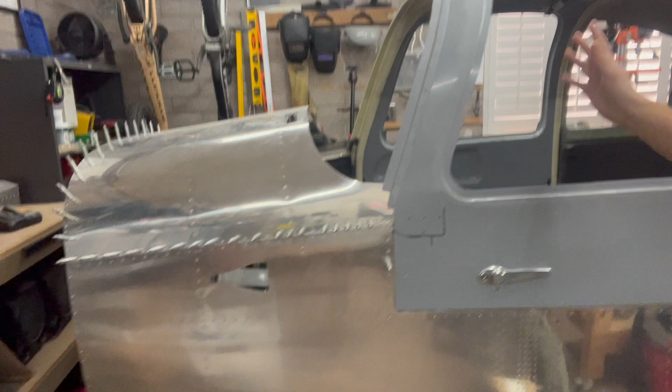By the end of the video you'll see the doors being done, and I use that term loosely. They're mostly fitted to the side here. I may have some work to do on the gap still. I don't have windows, and don't have seals just yet. This stuff is temporarily in place, but the doors are good. That's that door there, and I'll show you the other door real quick before we jump into the video.

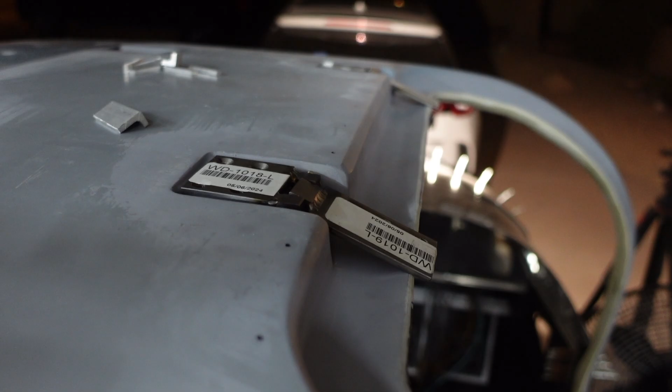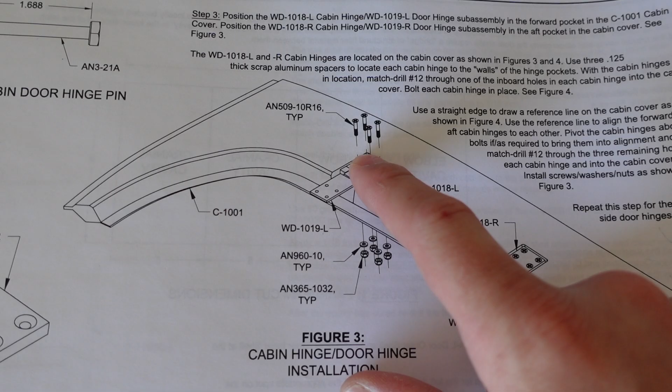Alright, I went ahead and last night ordered new hardware, but the hardware called out is 16 length screws, which is very, very long. I'll show you real quick, but I ended up ordering 14 length, which I think will be a whole lot better, or else I'll end up with an ugly stack of washers underneath here.

Going back up here where I haven't yet drilled all the holes, just the initial inner hole, that's a 16 length screw and you'll see it's way too long. I have that hole drilled, the inner hole drilled, so I'll continue with the plan of drawing a reference line, keeping them square, and continue getting them match drilled together.

I don't have enough of those 14 length screws to do this, so I'll just end up with a stack of ugly washers underneath for now, temporarily. So let's get to it.

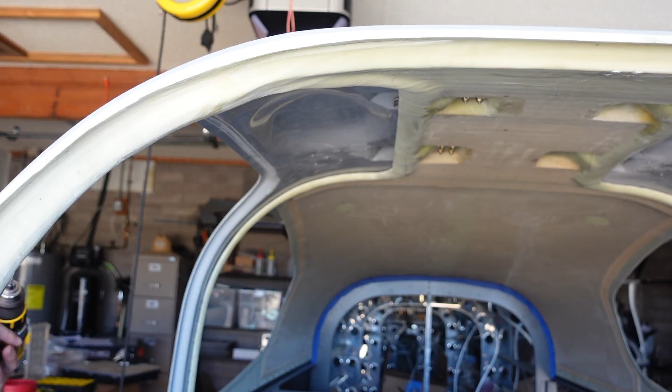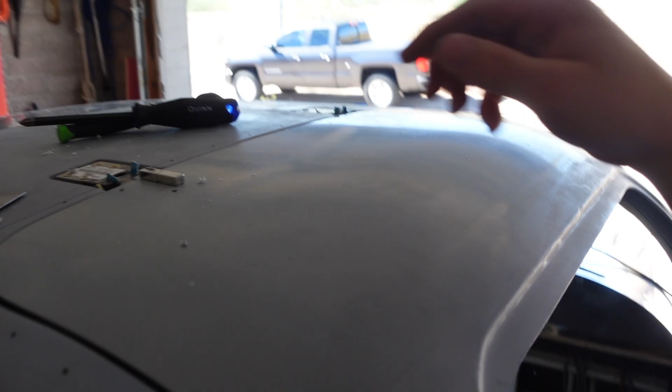Don't do what I did. I did not hold the top down while doing that, so the drill bit was pushing the cabin top upward and away. Now that hole doesn't line up right with the hinge underneath. I'll have to take this off, fill it, and redo it again.

If you're doing this, yes, the magnet works. Little spacers here keep the hinge centered - I saw a post recently of someone asking how to keep that centered, and I chose to use a couple pieces of aluminum. So next time I do this I need to keep positive pressure downward while drilling from the bottom.

The other thing you'll see is I have the screw backwards here. The reason is there's a little lip on the inside that was keeping the hinge from sitting perfectly square, which is no worries - I just flipped the bolt to the other side, knowing that during final assembly I'll probably carve out a little room for the bolt head to have it in the proper orientation, because if you look down the side, it's sitting slightly proud on top there.

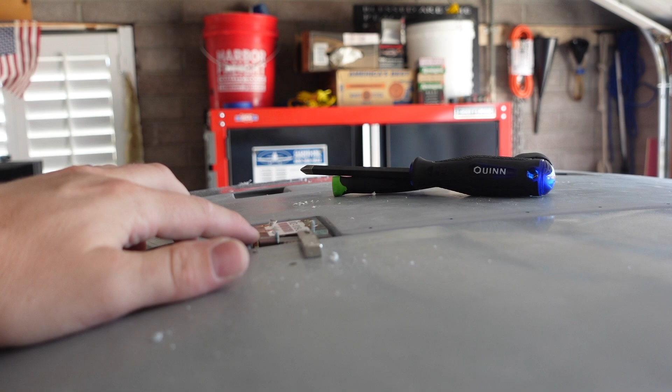Anywho, quite a few lessons learned here. The magnets, yes they work. Shims to keep it centered, yes, but keep downward pressure while drilling from the inside, or else you end up with a crooked hole like me.

Might as well give this a shot. I was going to take this off right now, fill it, and let it cure, but since I'm already going to be messing with it, I might as well try this first. If it doesn't work, I'll know for next time - that way I'm not letting this cure, trying it, and having the same thing happen again.

Sorry, Amanda. Hopefully she never sees that. Now you can get a better idea of what happened here.

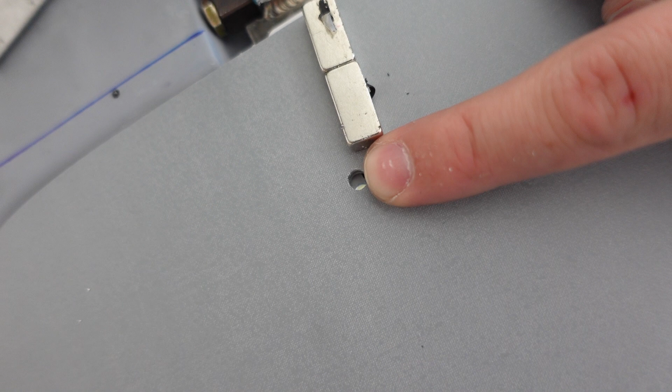So the first one there, the whole thing shifted. It kind of lifted up as I was drilling. The second one with the weight on it, which now no longer weighs 25 pounds - now it's 25 pounds minus that much. But anyways, the new hole is there, so you'll see the definite offset there. So you definitely want to weigh it down or hold it down by hand when drilling this. Again, I'll just end up filling that, letting it cure, and then re-drilling this hole here.

So I'm gonna go ahead and knock out the rest of these and check back in with you in the future.

Late night session for Bob the Builder.

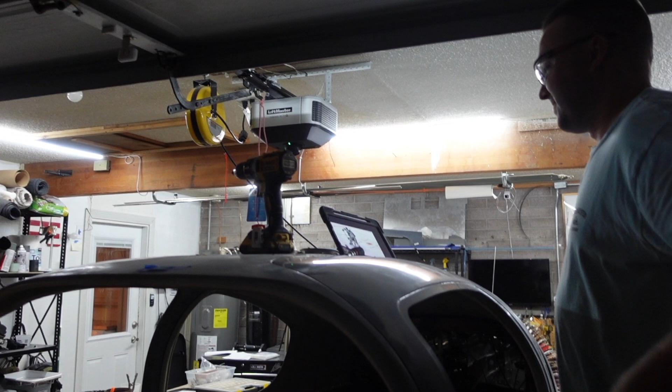Doors are going on, or at least temporarily going on. There's some multitasking happening over here. Let's see if I can zoom in. I'm being a horrible YouTube content creator.

Yeah, I'm not recording this, but Permagrit countersink heads are awesome. I bought the full set that comes with every size of screw. It's a really, really nice countersinker that works perfectly with each size screw. What's it called? Permagrit. Permagrits. I think they're somewhere across the pond.

So next step, safety latch. I am not going to be doing section 45A, which is for that cabin door safety latch that the plans call for, and that's included with the kit.

So I bought the 180-degree third latch deal, and then the next day I had second thoughts. I was like, you know what, I'll buy the angled door pins too, which I'll get to later. But it should look really, really nice.

But shout out to PlaneAround, they have fantastic customer service. I placed those orders one day apart, and it was one of those things where you place the order and the next day you're like, dang it, I could have bought that one other thing and saved $10-15 in shipping. But they actually caught that, and they sent me a message saying, hey, we saw you place another order, we're gonna refund you that shipping amount and ship it out in one box.

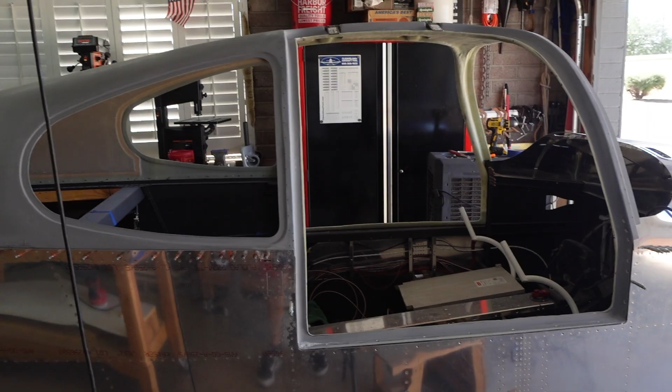So another thing we will most likely be doing is keeping the door seals stock, which is very contrary to what other builders are doing. Most people are ignoring the factory seals from Vans. The factory seals sit on the inside. I'll include a picture here.

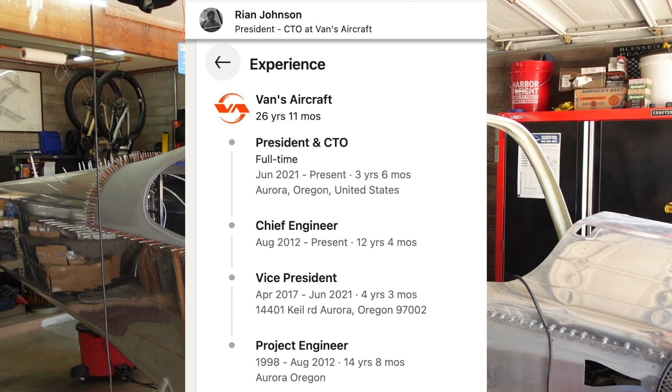When I was at the booth at Oshkosh and talking with Rian Johnson, I asked him for his opinion - hey, what's going on with the door seals? Were they really that bad that nobody puts them on? He mentioned it was one of those things that caught on and just took off, and it became kind of the standard for a lot of builders, but he said there's no issues with the factory demonstrator plane using their seal.

Another thing he mentioned, the reason why he doesn't like it, or why they don't endorse the McMaster seal, is that this gutter system is a piece of the overall structure of the top canopy. My own uneducated builder perspective, and likely a lot of other people's, is if most people are installing the McMaster seal and they're fine, and we don't have canopies collapsing on people, it's probably fine to do. Again, I don't know what I'm talking about, but I think that's the general consensus - that it's fine to modify this.

But given all this, and looking at the picture of the one at Vans, I didn't think it looked bad. I know a lot of people mention in their videos or builder logs that the one from Vans is ugly - I don't think it looks bad. No one else out there is doing the stock seal. If it's good enough for the factory demonstrator plane, which gets opened and closed all the time and gets lots of use, it's probably good enough for our plane to keep it stock.

So we'll be one of the only ones out there using it. So yeah, it should be fun.

So I'm gonna go ahead and jump into doing the door latch install. I'm not honestly going to get a lot of close-up stuff in the very beginning here, or else I'll just be burning footage, because I'll be staring at instructions and little pins and whatnot. But I will do recaps with little lessons learned along the way, or at the very end I'll provide you a recap of what I found and what I did.

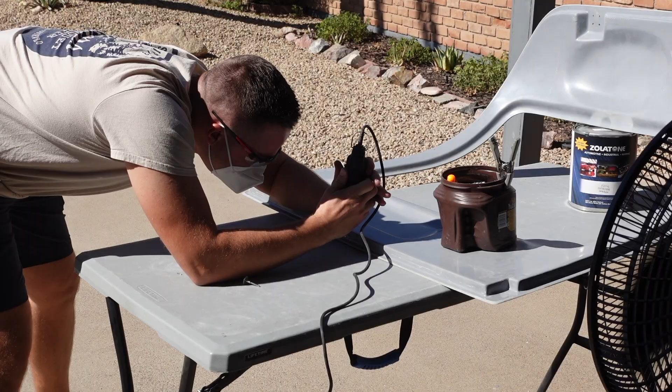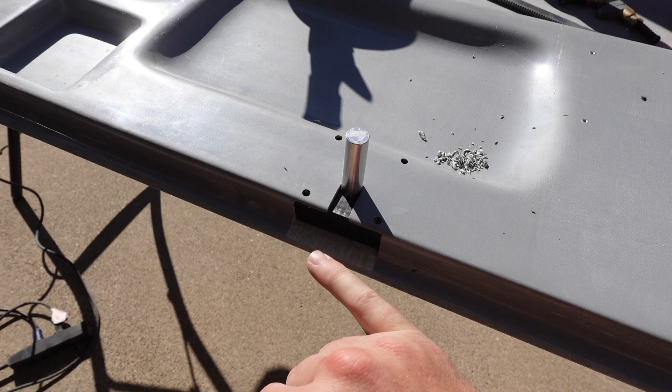So I've got this cut out, match drilled in there. One thing to keep in mind - I don't know if the plans are made so you're able to glass this in after the fact or not, but if you follow their plans and drill your hole that you enlarge to a half inch where they have you do that, it ends up being pretty deep in there. I think that's gonna be fine. I may end up actually glassing in the bottom. I'm not sure yet. I saw in his instructions he mentions that his is going on 11 years and still doing fine without needing replacing.

So I may end up just glassing it in, but I've seen in other build logs or videos where people have it nice and flush there. If I was to do that, I had already actually drilled this hole where it called out, so I'd end up with that gap. Instead, I just left it - I match drilled it where I had already enlarged that to a half inch up top there. So I'm gonna end up with a little bit of a gap there. I may end up glassing this in, or maybe just shim it with a piece of aluminum that matches, and then do my seal on top of that.

You'll never see it. Anywho, so I'm gonna go ahead and move on, start the next one, and then probably get the little support brackets epoxied in there.

The blocks - whatever we call them, the reinforcing blocks that they have you epoxy in there - are in and cured. So now I'll have to go back through. I'll have to do a little more sanding just to get any clumps, since there's really no way to work super cleanly inside of here.

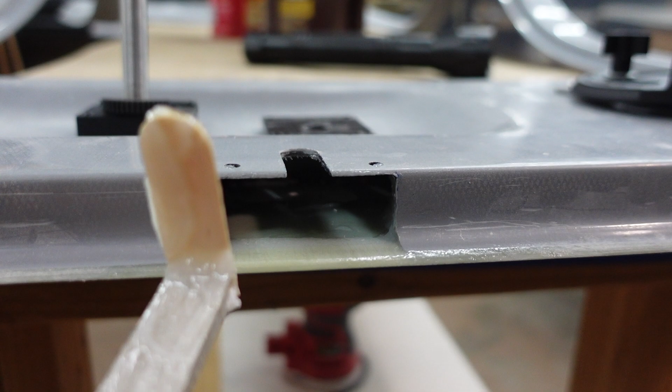But one thing I wanted to mention that helped me work cleanly - I took a tongue depressor and super glued it to the end of a piece of a stick. What that did is allowed me, when I had this epoxy in there, to be pretty dang messy, making sure I had a good fillet on the top and bottom, but also ended up with quite a bit of epoxy on the back side.

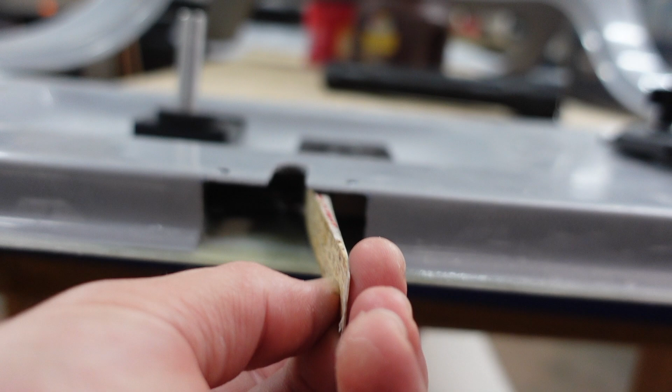So I took this tool here, scooped it through, and I was able to really kind of smear it around. I can't see in there, but I'm assuming I ended up getting a nice amount pressed up against the back side of each of those blocks. I think it also kept this area clear of epoxy where we're gonna have that gear.

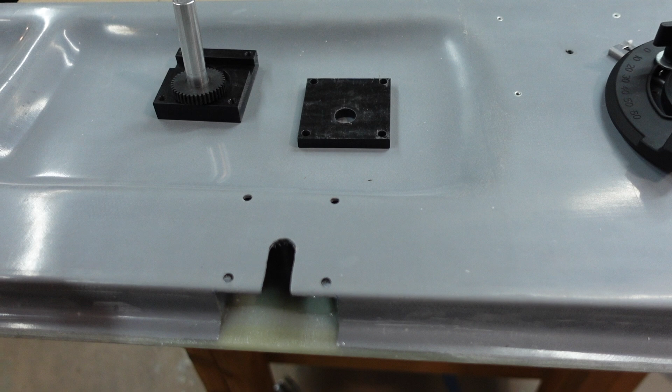I don't have it in front of me, but there is gonna be a gear inside of here, so it kept that area clear. If I did not use this, my messy job that I was doing, if it cured, would have probably left a pretty chunky layer back there behind these blocks. So that worked well.

Alrighty, YouTube. I am working on the handles, and I'm having the same struggle that every other builder out there seems to have, because most people are doing the flush door handles with the Aerosport third latch and the stock setup for the rest of the mechanism. So you're trying to incorporate 3 different sets of plans. There's no real easy way to do this, especially filming.

Filming, I've found I've already burned through quite a bit of footage already, where I think I'm about to start doing something and then the camera's recording and I'm just staring at a part. So I'm going to do my best to provide all the little gotchas that I can, but I apologize ahead of time - it's not going to be the most seamless thing in the world.

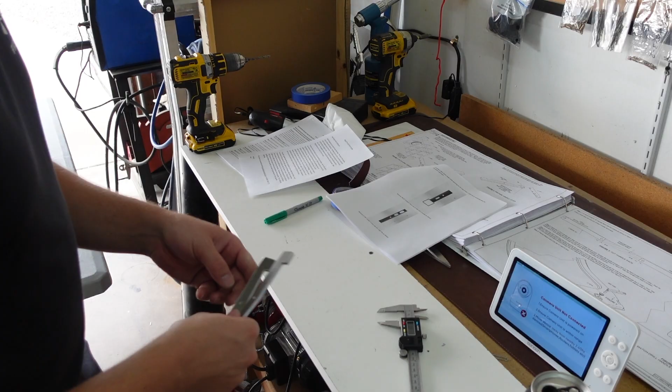So I've gotten ahead of myself a little bit by prepping these, but it just looked too fun to do. So I've straightened these, prepped them, got them ready. But now jumping back into the earlier instructions, one of the first things I know I'm going to have to make to modify the van's handle is shorten the actual handle, this post steel - this is the stock handle from Vans for the interior side.

And I'm gonna have to go down to that green line there. The reason why that line alone took me a long time to do is look at that hole there - I do not want to bust that little bit of an edge that I have on the side of that hole. So I'm just really double checking, making sure - am I sure these measurements are right? Yes, I'm sure. I'll continue from here, but it just kind of goes to show I'm really trying to be careful.

I was talking with someone earlier about the handles, bouncing ideas off each other, making sure we're on track. This particular builder already cut down their racks, which you do not do. I won't give you a hard time on video or publicly shame you, because that's a bummer, but there are lots of little hidden gotchas.

So if you're getting the kit, don't follow the instructions. If you're installing the Aerosport third latch, do not cut these down. Leave them at their length until you get to the instructions from the Aerosport latch, not the Van's instructions. With that said, I've got these two marked out.

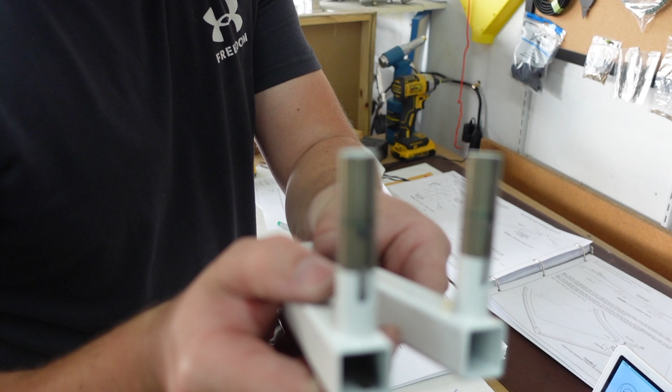I am removing 0.820 inches from these two parts here, you'll see those green lines. The next ones have to trim down 0.861 inches on these guys here.

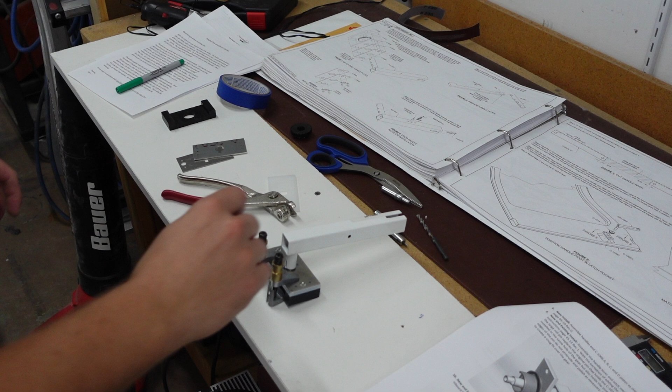Alright, up to step 8 on the Aerosport install, which directs us back to 4510 on the Vans install. So you'll see here I have this ready for match drilling. I do have this black block on the backside - I don't think it ends up getting used, but I'm following the instructions, so I'll go ahead and get all this match drilled per the Van's instructions, and we'll continue from there.

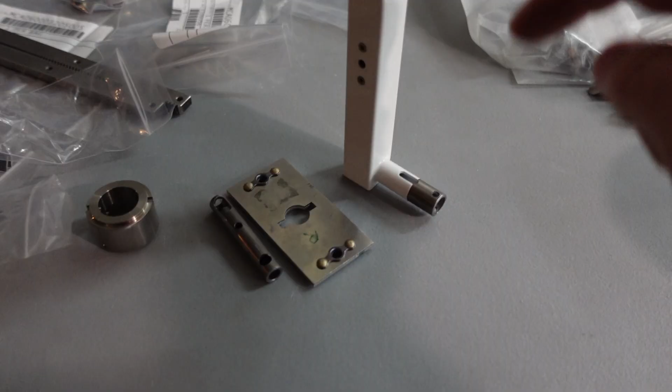One thing is this here is where a pin is going to be riding in and out, up and down. This is a handle that goes on the interior side of the RV-10, factory from Vans. It's used even if you're doing the flush door handle. This little slot here is for a roll pin to sit inside of, and that roll pin uses this area with a spring.

I'll just show it to you. It uses that little area with a spring, and it allows the roll pin to move up and down and unlock the handle. So what I found the first time is I put this part in location.

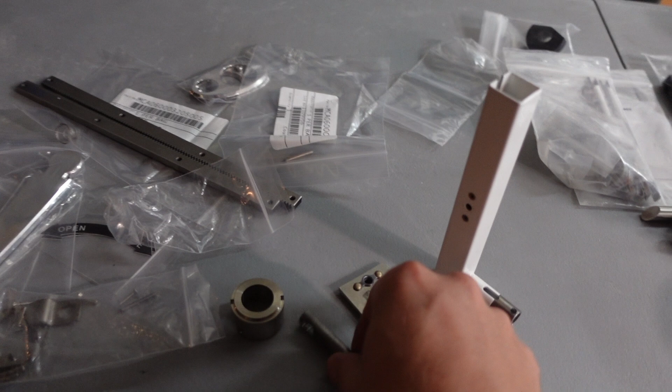I had everything ready to rock, trying to do this one-handed. I jammed a roll pin inside of there, but what happened was the inner area here, which should slip on the outside of that roll pin and should not stick to it, stuck really hard to the roll pin, and this pin was going nowhere.

So you do have to grind this out a bit. I used a tungsten bit on a Dremel to grind out clearance for this roll pin to slide up and down. Do not just jam it inside of there, because you will have a fixed part that does not move.

The other gotcha on this part itself is this powder coat finish. You do have to remove quite a bit of powder coat finish in order to get the gear and the rest of the assembly to slide over. You can kind of see where that powder coat finish had to be ground off to allow it to spin, but prior to doing that, it was really binding - it actually wasn't sliding over.

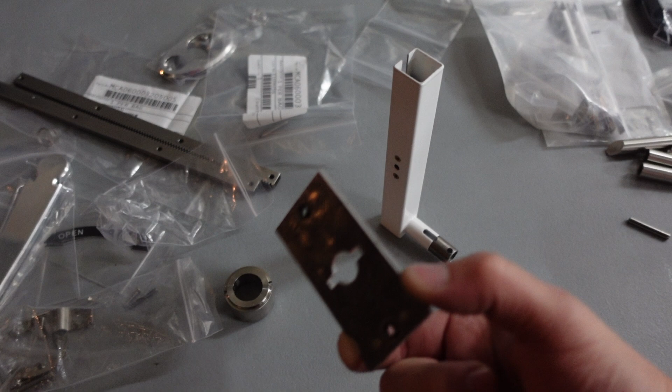I could not get the gear side to slide over far enough in because of that powder coat interference. So jumping over to the Aerosport side of the instructions - they mention in the plans building this assembly here following Van's instructions, and then from there incorporating it into the Aerosport side of things.

So this part here, they make no mention about this little channel in here. I got this whole assembly put together, but what I found was I got it all put together, and then I started remembering there were a lot of YouTube videos I saw where one side had a bigger cutout than the other. So the reason why this smaller sized opening is an issue is with the Aerosport handle...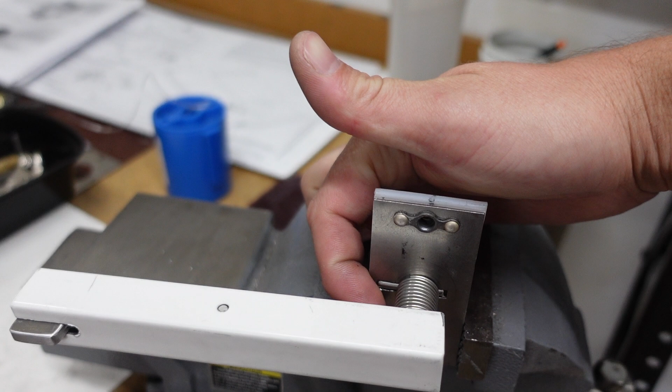You end up having a lock on this side here, and that lock has a little tab that hangs over the edge. With the stock size in there - you'll see this one has been updated since, I've modified this since - I assembled this whole thing with the stock roll pin, the stop gap and everything, and then I realized that lock would have nowhere to grab.

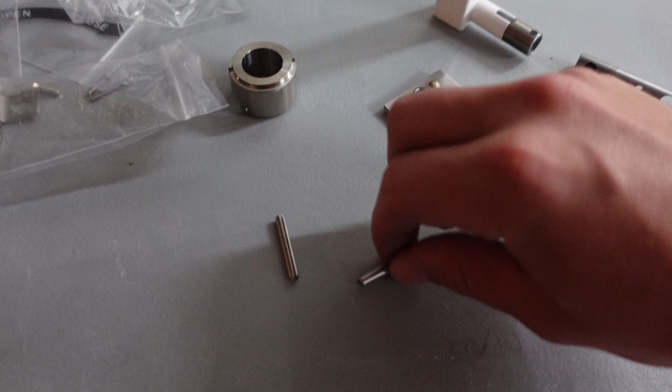The Aerosport instructions do not call that out, so I had to fully disassemble this again, drive out roll pins - pain in the butt. But you have two different size pins. The smaller size that they give you, this one here, which you'll notice is larger than the stock opening, is the one that you're going to modify this strike plate with. So take a file, or whatever, and extend this out.

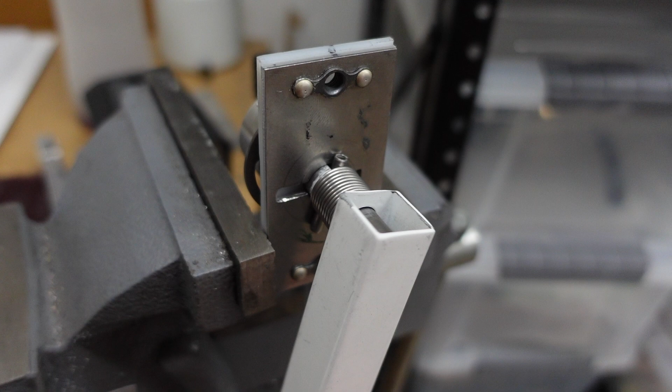The lock is going to be on the forward side of the handle, so left and right will be mirror images of each other. That is why you have the different size roll pins. One size roll pin fits across here, hard to do one-handed, and the other size roll pin fits across this part. You end up with the smaller roll pin with your modified strike plate that accepts the pin, and on this side, the longer roll pin, which you can't see anymore because of this E-clip. The longer roll pin drives through the gear and through the center portion. Lots of different moving parts here.

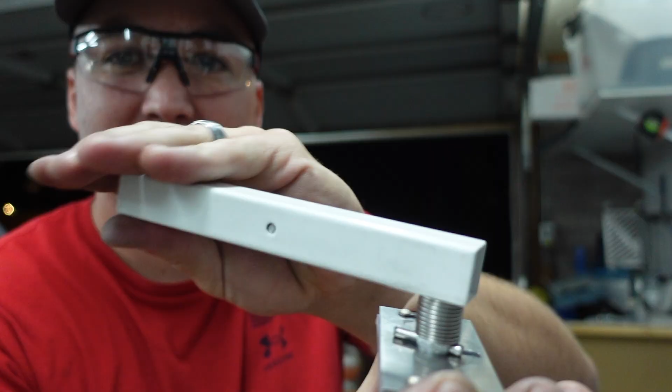Gang's all here. Camera doesn't want to focus, but it is satisfying. Pretty cool.

Okay, Aerosport low profile handle. Before doing this, I'm not going to cover everything in depth, but watch the video by Good Plane Living. I forget his actual name, but it's an incredible video that goes over full detail of his install and how to install the low profile handle from Aerosport.

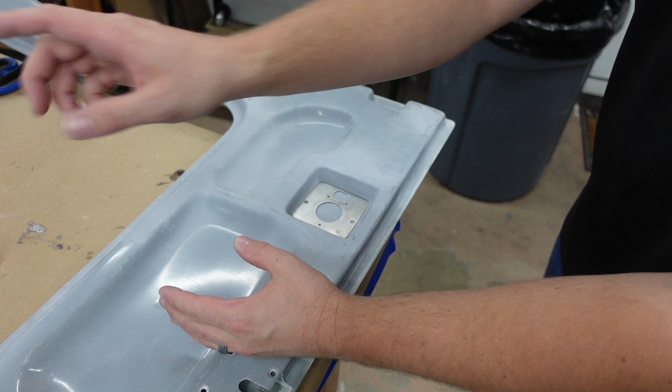I'm going to be doing things outside the order of these plans. For instance, where it calls for using a number 12 bit and drilling out these holes first then putting bolts in, I'm going to drill the smaller holes, put clecos in, get this firmly secured with clecos, then drill those holes. Little things like that, I'll be going out of order.

I'm not specifically following these plans because, like I mentioned before, you have 3 sets of plans. At the end of the day they all kind of turn into a big mush, and it really comes down to you figuring out the best method for you to get your assembly put together. So with that said, I'm done talking. This video is probably getting really long. I won't talk too much other than key points—enjoy this time lapse of me putting together the system.

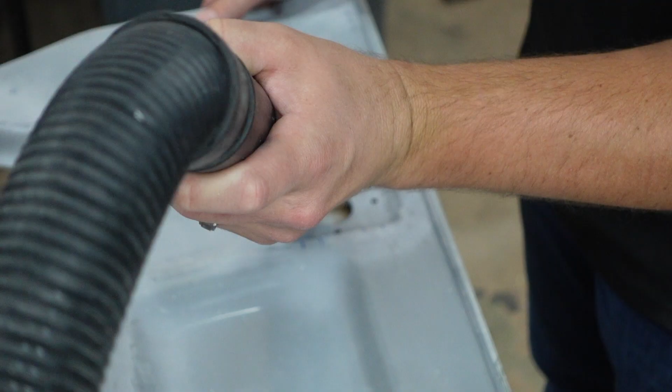Quick overview of what's going on. Please, if you are doing doors and putting this together, look through all the instructions. I may be getting something totally wrong here, but this is how I am interpreting the plans and choosing to do it with our plane build.

The first thing I wanted to get to is that rack that you saw me magically tap into 2 pieces and drill—that was this rack here. Hopefully you can see on camera there's a blue Sharpie mark there and there's a blue Sharpie mark there, that's where those used to be connected. I've done that for your viewing pleasure to help you follow along. So imagine that rack used to be one long piece.

That is where that rack is going, those 2 5-inch racks that you make from the long 10-inch rack when you cut it into 2. The plans have you drill those holes there—it sounds like to put rivets in. I'm not going to be doing that. You do your own research. If you are putting this together, you'll see how sturdy this thing is, what the limits are, and how it works. So I am ignoring those for now.

Going on further, you'll see this piece here is provided by PlaneAround, connecting that bottom rack we cut with the rack that came from PlaneAround, and that 3rd latch is going in here. As this rod moves forward and aft, it's going to spin that little axle that's on there, which is that 3rd latch. From there it connects to this really long rod, which we'll be cutting down. The reason it's so long is the stock door latching mechanism did not incorporate this in the middle—it actually came all the way over here, which makes more sense as to why it's so long.

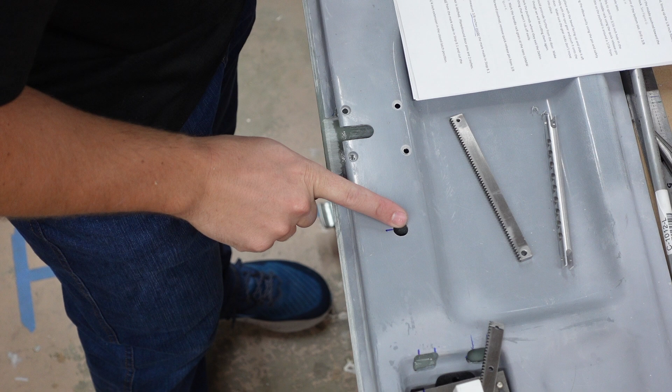So I chose to go up in size here. I think it calls for a 3/8 inch hole in order to get the pin in and out. What I found is if I went up to a 1/2 inch, it allows me to get the pin in and out pretty easily without having to have safety wire on it.

I went to the hardware store. These were about 50 cents each, just little plastic plugs which I'll use after painting this. We're going with a dark color, so that'll work really well. After this is all said and done, I'll be able to push that in and cover it up nicely.

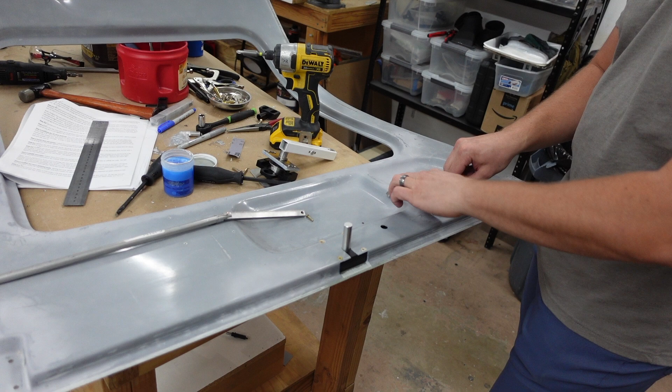Alright, so I'm gonna start getting everything lined up inside of the door here and assembled into the handle. The bottom rack right now is living together with the machined rod. You won't be able to see it on camera, but they're both inside there loose. I'm not gonna lose them, they're easy to get to, you can use magnets to fish them out, or pliers. The reason I put them in there is with the handle in place, you're not able to slide those in after the fact, so they have to just be placed in there and dug out after.

Now, next step, I'm going to get this long guy all the way through here into this gearbox in the middle and continue from there.

It's kind of fighting against me, so I'm gonna go ahead and get this bent to the profile. I'll get the front one. The front one barely needs any bend at all, basically just trying to match it to the curve of the skin. So I'll knock it out real quick and we'll try this again.

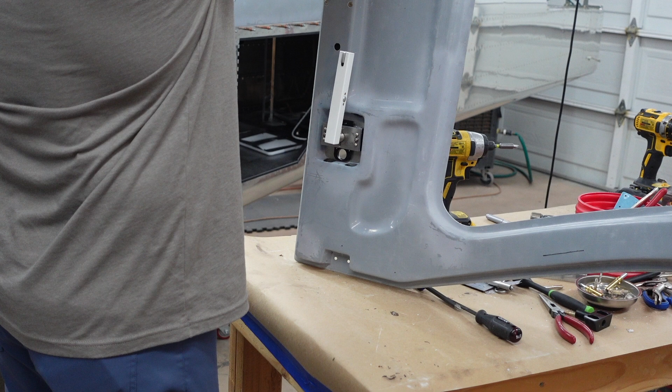I think that's it. Nope. Hey, I got it, I got it. And that was out of view the whole time. Dang it, that was out of view the whole time, but I got it.

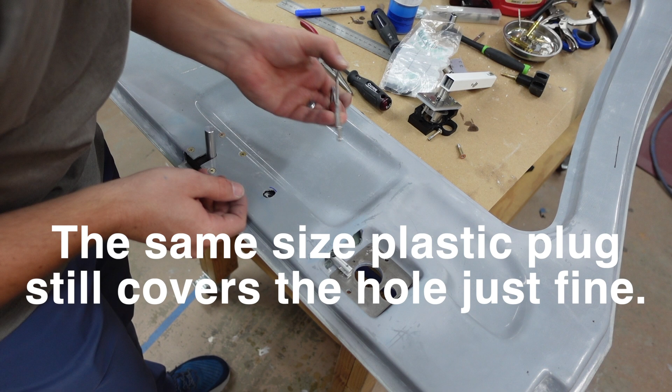Alright, I made a mistake. This hole here I drilled wrong. I don't know how, I thought I copied the same measurements that I had on the other door and the instructions, but it turns out that hole is obviously very, very low relative to the pin. So this needs to be able to drop in right about there. I'm going to have to widen this out, but there's your pin. I'm not worried about safety wire, I have these fancy little medical pliers, whatever we're calling them, and I'm able to get the pin out. You'll see it has a little detent on it, so it snaps into place where I shouldn't need safety wire.

I will see you after I get that handle back on there.

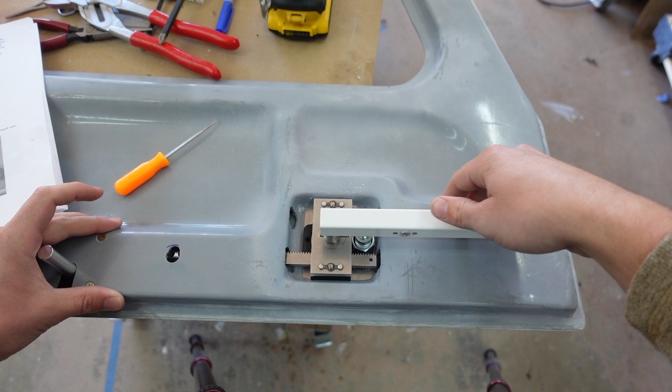Alright, so I am happy with this. You probably saw there, but I first got the bottom rack in and then disconnected it, pulled this rod back out, tucked it away from this rack, left this rack in location where it was allowing me to not have it bottom out back here while getting the front one on. Then once I got the front one on and got that one to the proper rotation, pretty much just a hair past 180. I tried going one notch to the right, but that was kind of landing me right about there.

What's happening is this little ground down edge is contacting the fiberglass. I think that's to be expected, that's why they have you bevel that down. But that ends up acting as the limit basically on the rearward movement of the handle. And then the other limit happens just past this flat portion, right there. You'll see if I lift this pin up and try to go further, what's happening is it's actually binding there where it contacts this block here. So all those limits in place, I'm happy with where this is at.

So now I'm going to go back to the instructions here, read it 25 times, and then go ahead and make my cut. I'm gonna get the blocks put in location, mark it where it tells me to mark it, take it off, cut them, and then I'll be ready to tap them for the tips or whatever that go inside of them. So we'll get to it.

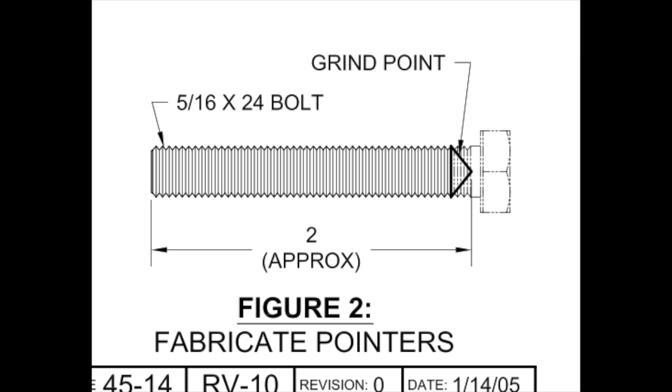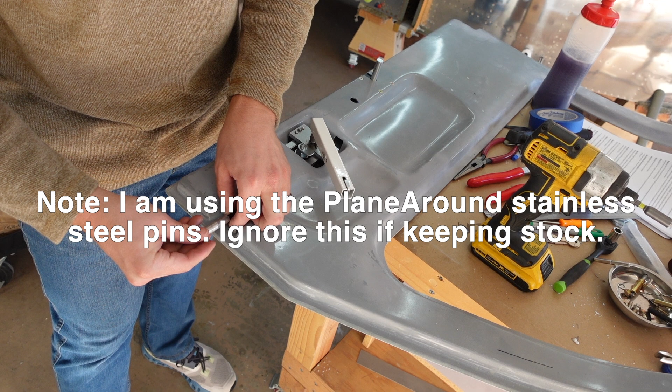I can adjust this as needed, and then use the threaded insert from PlaneAround and thread this over it, giving me a nice way to poke the side of the fuselage structure. I don't know if you can get away with this using just the standard Vans method - comment below if you can. I thought it would end up short since we cut our push rods down more than Vans has you cut them, but this worked out really well on the other door.

So now I have a way to poke it. I take my block, insert it on the end here, and operate the handle to stab the side of the structure once it's clecoed in location. I'll remove this, put it on the back side of the door, and do the back pin - doing them individually so I can really focus on lining up one side at a time, making sure it's flush with the fuselage, poke it, stab it, take it off, move to the other side, do the same thing. I did that on the other door and it came out beautifully. Anyway, let's get to it and see if we can knock this out.

Little indent is right there. I'm gonna switch the pin around to the other side, recleco this on, stab the back side, and then I'll be ready for drilling.

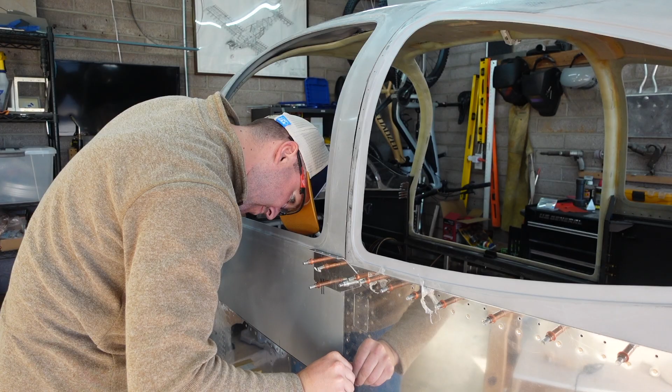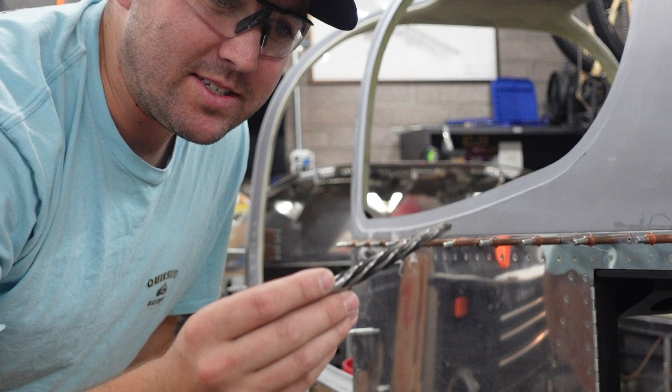On the other side, I used standard drill bits and found they really wanted to grab the fiberglass and the aluminum. As you get to those larger drill bits, they just want to shred the piece. So I went on Amazon and bought this reamer, a 7/16 inch reamer, which starts smaller up front and goes all the way up to 7/16 in the back. I'm hoping this will prevent some of that grabbing and tear-out, that chunkiness. I'll let you know.

That was awesome. Hopefully you'll be able to have the same satisfaction that I am having through your cell phone or portable computer screen.

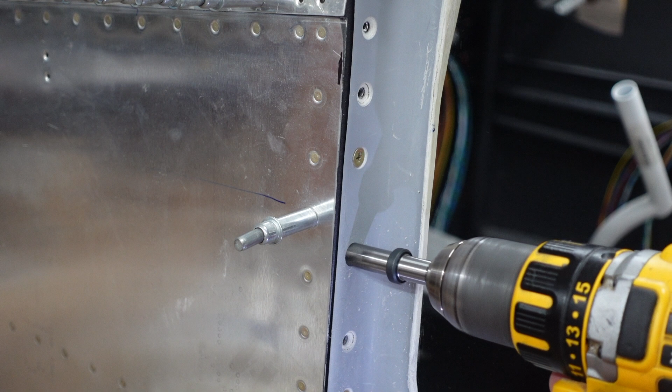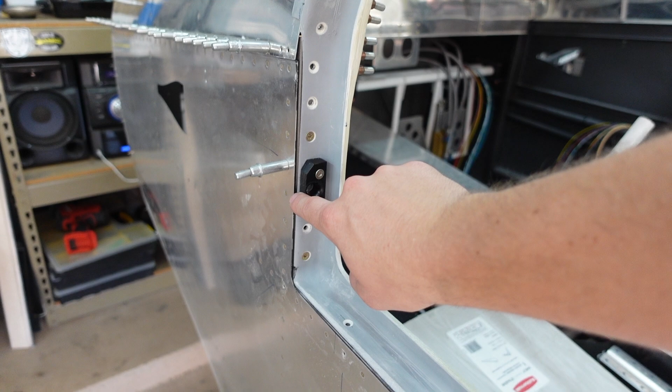Alright, so I have the blocks sanded down. The backside matches the profile of that flange there, and I'm happy with those. I also had to sand down the front of them where the door was interacting with the block itself - it was pushing the door proud of the outside here, which was leading to alignment issues on the pin. Now I have all that squared away.

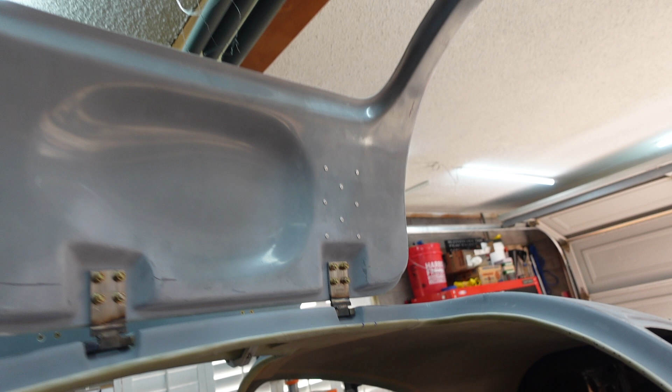It is happy. Next step involves getting the bracket ready to install here for the hydraulic arm. You'll see a couple of Sharpie marks on there - that's where I have to carve out extra room to get those little ears to go up and over. When this is nesting inside of there, those little ears are running into the fiberglass. So I'm going to show you real quick what I did on the other side to deal with that - I had to notch out the fiberglass, not only to make room for the ears, but also to get the bolt in and out of there.

So I think I'm going to call it here. I have so much footage, this card is about maxed out - I'm up to 3 SD cards so far, so I'm going to stop recording at this point.

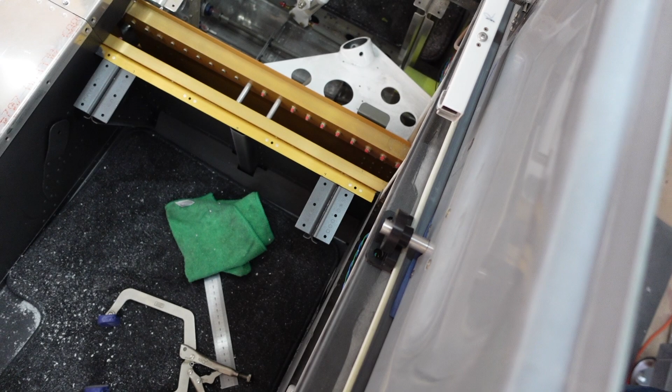I think I've given you enough of the gotchas up until this point that I wish I knew prior to doing doors, but I'm basically going to finish out the other door just like this one is finished here. You'll see another remaining step I have to do on the other door is this little third latch deal, which on this one is engaging nicely and sucking that door in. So again, a lot of footage - I'm gonna call it quits here.

Hopefully this video was helpful. Doors were very tricky, and they still will be. I have a lot more work to do - I have to get them disassembled after I get them finalized, get them prepped, figure out my door seals, and take the whole canopy off to prep the inside of that for paint. So there's a lot of moving pieces just in a couple of sections in the plans here, and this has probably been the most trying part of the build process. It is a lot of work. So anyways, made it this far - thank you so much for watching, and we'll see you in the next video.